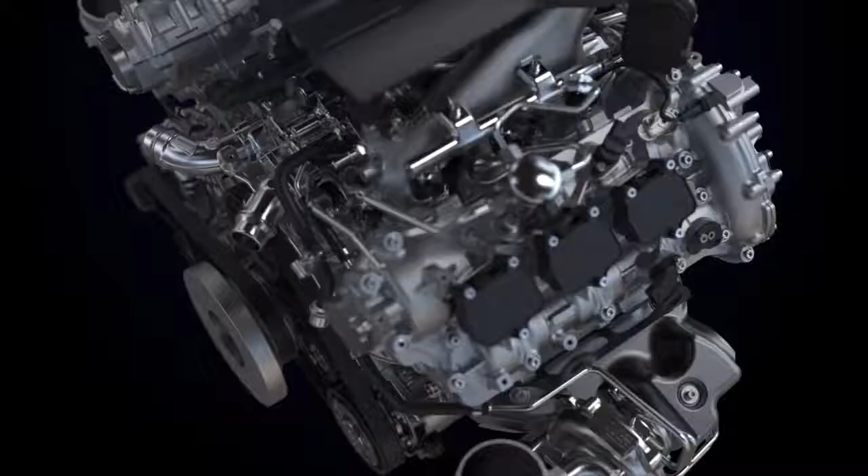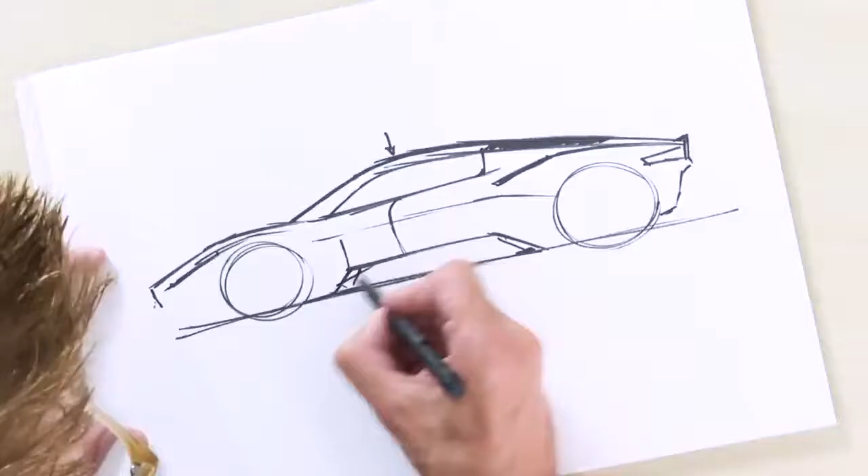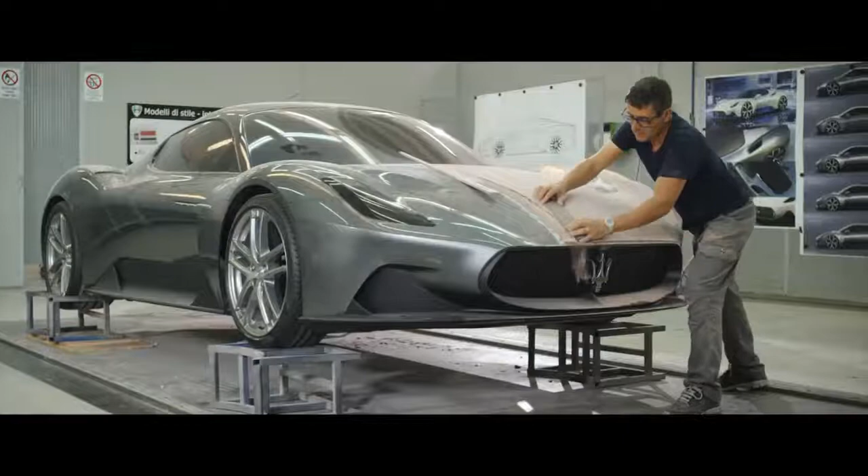Hello everyone and welcome. In this video we are learning about Maserati's fascinating new engine, a twin-turbo V6 that uses dual combustion chambers, with a pre-chamber igniting the main chamber for more efficient, more powerful combustion. This engine is going in the Maserati MC20, a car that was developed in the heavens using emergency blanket technology, brought down to earth, sculpted in expensive Italian Play-Doh, gift-wrapped with the same attention to detail you're used to on your own presents, and now displayed proudly to eyes around the globe through the internet's best free video site.

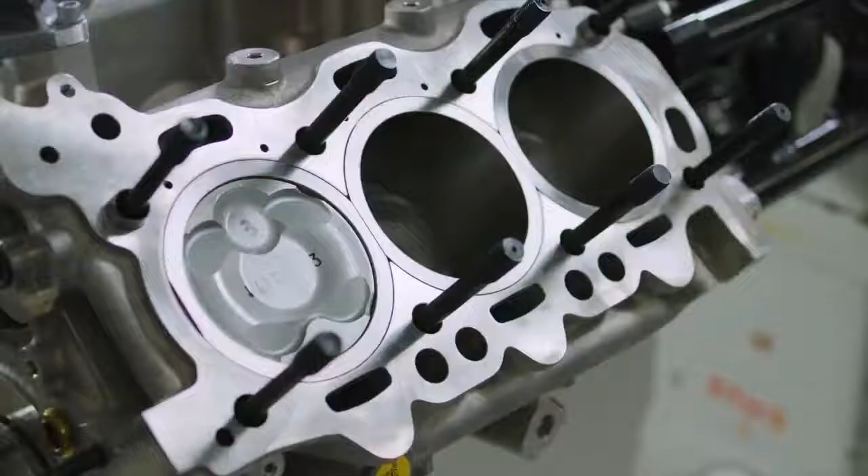Now, pre-chamber combustion is nothing new. Honda was using a similar technique in the 1970s, but Maserati has a unique approach to using pre-chambers in gasoline engines so that they can meet today's emissions requirements while still providing horsepower benefits.

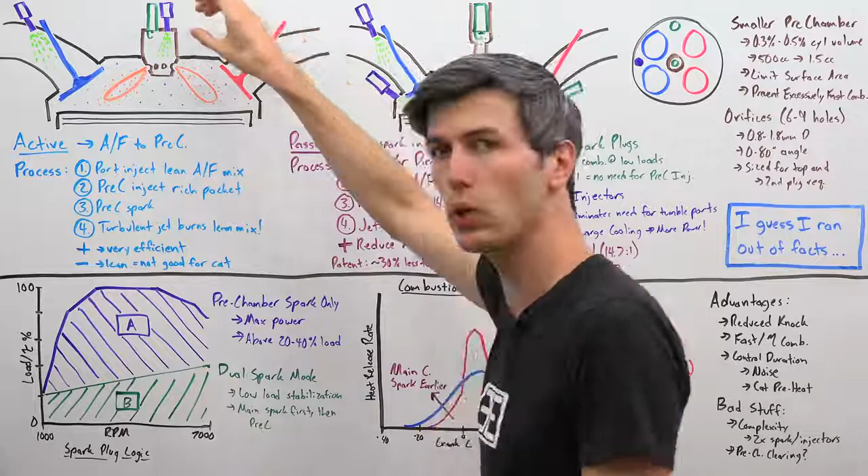I don't know of any current production cars out there using pre-chamber combustion technology. However, there are engines out there which are using active pre-chambers versus what Maserati is doing using a passive pre-chamber. The main difference is that the active chamber can put in fuel or air or both into the pre-chamber, and Maserati's system just has a spark plug with that pre-chamber. So it's not actively putting fuel or air into that chamber.

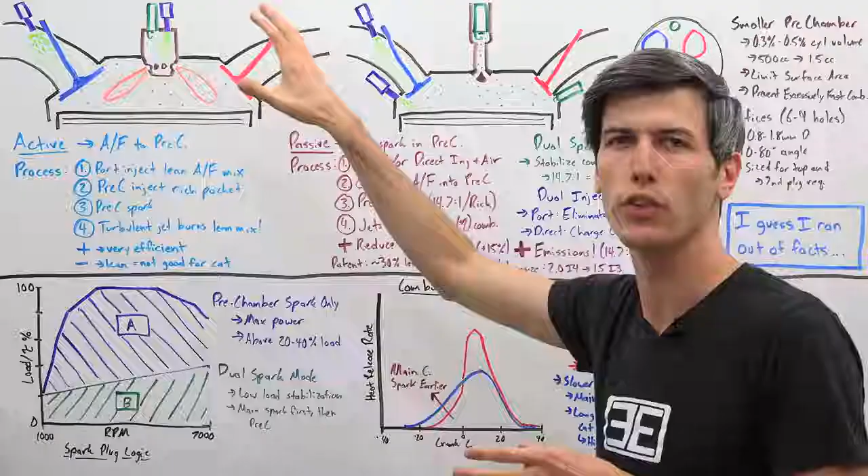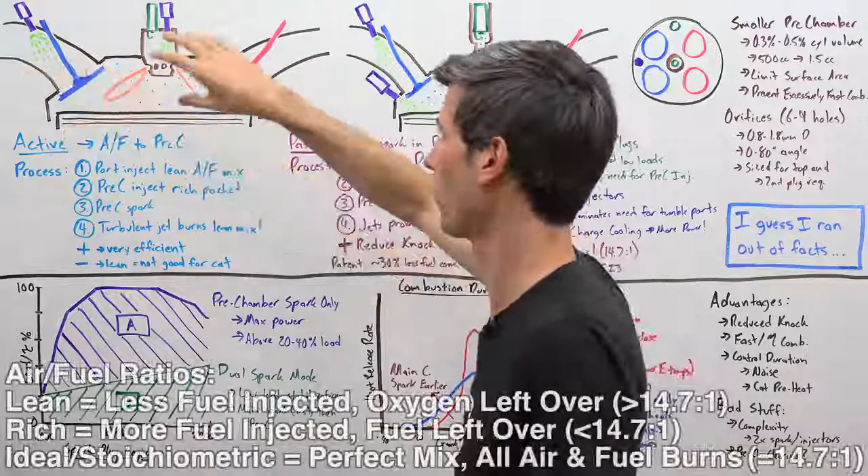So how do these active systems work? The process is as follows. You have two fuel injectors, one for the pre-chamber and one in your intake port. What this initial fuel injector is doing is getting in a very lean air-fuel mixture, so super lean, otherwise it wouldn't be combustible in a typical combustion engine. So a very lean air-fuel mixture that's coming in during that intake stroke.

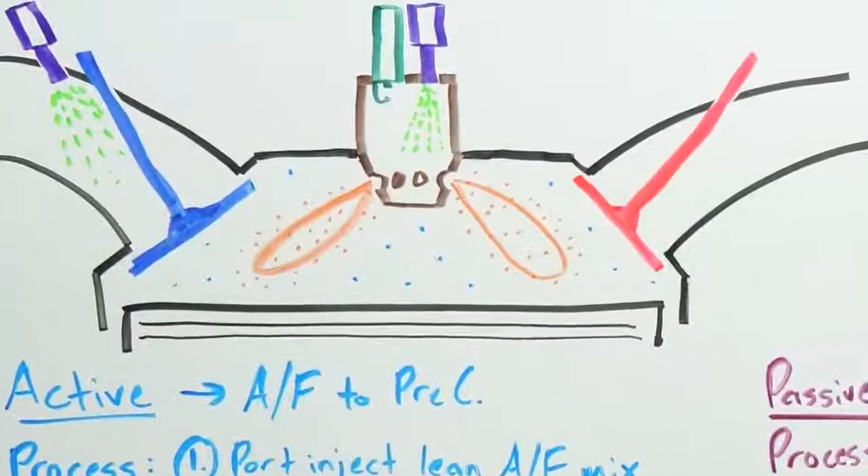Then you're going to pull in that air and fuel, compress that air and fuel with the piston, and then you have a separate injector which is going to spray fuel directly into this pre-ignition chamber. So now what you've done is you've created a rich air-fuel pocket in this pre-chamber, and then you have a very lean air-fuel ratio in the main chamber.

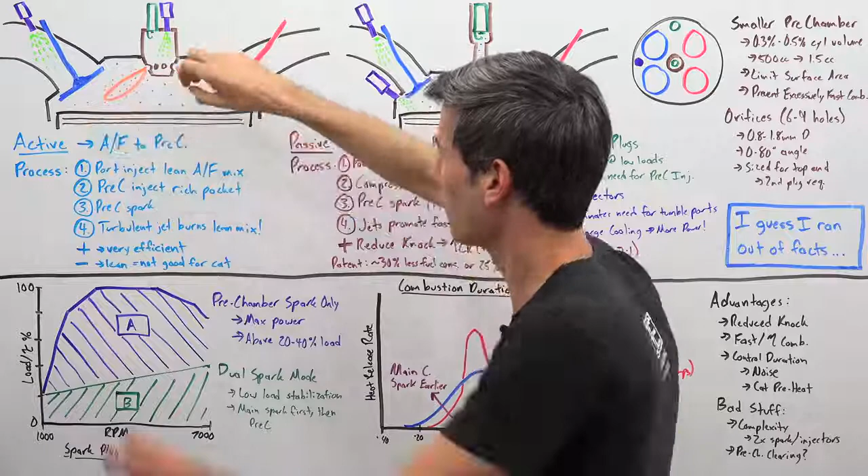And so you use the spark plug to ignite that air-fuel mixture, and what it does is it creates these turbulent jets. The pre-chamber has these little ports at the bottom of it, so that combustion comes spewing out in these turbulent jets, and because it expands over this wide area of the main chamber, it's able to actually burn off that lean air-fuel mixture.

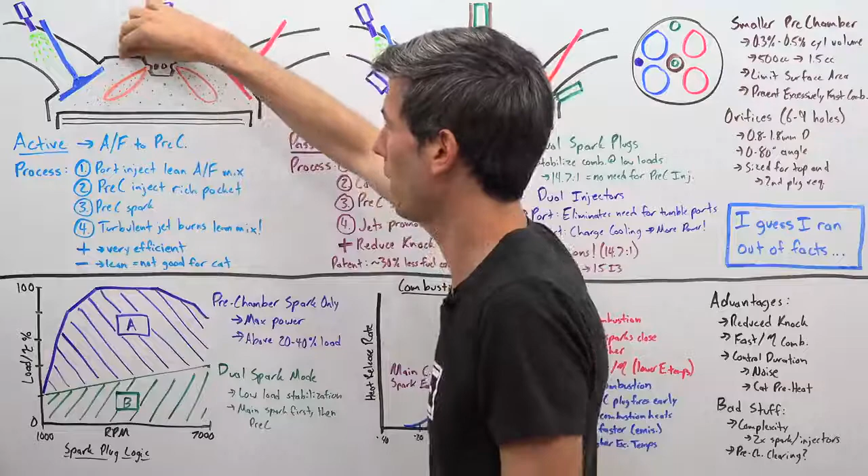Whereas traditionally, if you just had a spark plug in there, you wouldn't have consistent combustion. That combustion would spread very slowly. But because you shoot out these flames into the whole chamber, you're able to actually burn it. So the advantage of this is that you're able to use lean air-fuel mixtures that you otherwise wouldn't be capable of burning, meaning you're using less fuel overall, and thus it's a very efficient design.

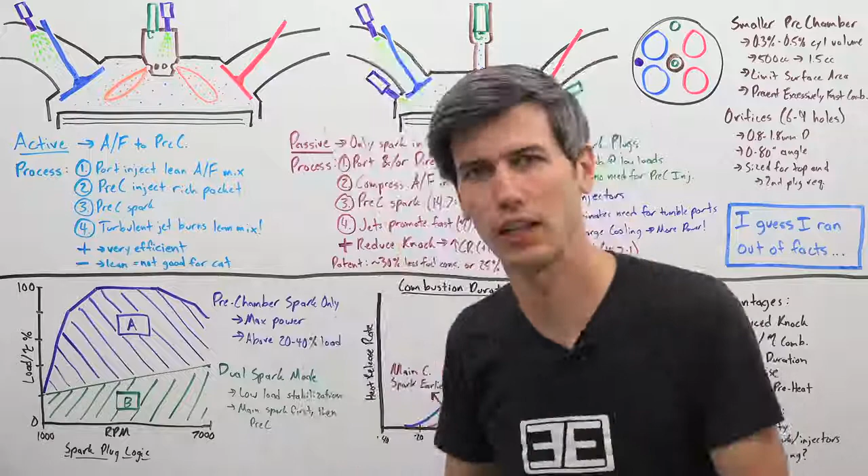Now, the challenge here is that for catalytic converters, which of course you need on an emissions compliant road car, they don't like lean air-fuel mixtures. They like it when the air-fuel mixture is right at stoichiometric ratio, 14.7 to 1. That is where catalytic converters operate in their most efficient region. And so because of that, using something like this is very difficult to do in a road car from an emissions standpoint.

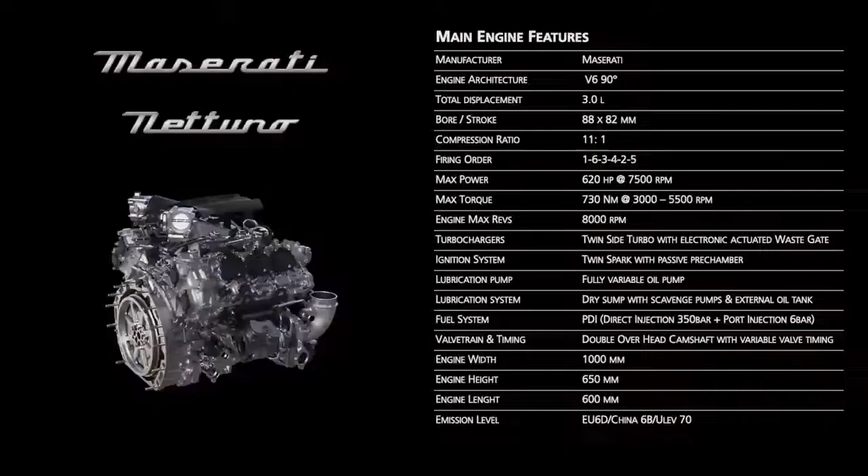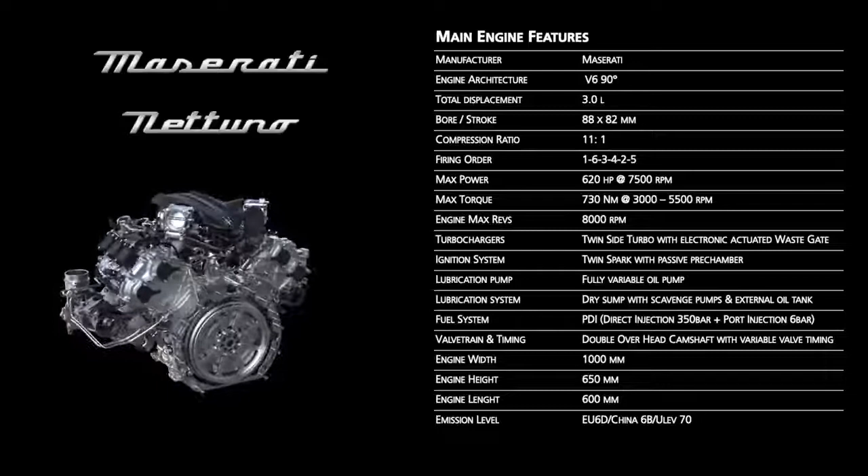Now, before we move on to how the passive system works in the Maserati engine, first let's just cover the general specs of the engine. It's a 3.0 liter twin-turbo 90-degree V6 engine. It's making 620 horsepower and 730 newton meters of torque with an 11:1 compression ratio and using relatively wide cylinders, each with an 88mm bore and an 82mm stroke. The engine revs up to 8,000 RPM, making over 200 horsepower per liter.

So how does a passive pre-chamber work? Again, passive simply means there isn't air or fuel directly injected into that pre-chamber. So how does it work with the Maserati? Well, basically you're going to have an option of either port injection, direct injection, or both. In this case, Maserati is doing both.

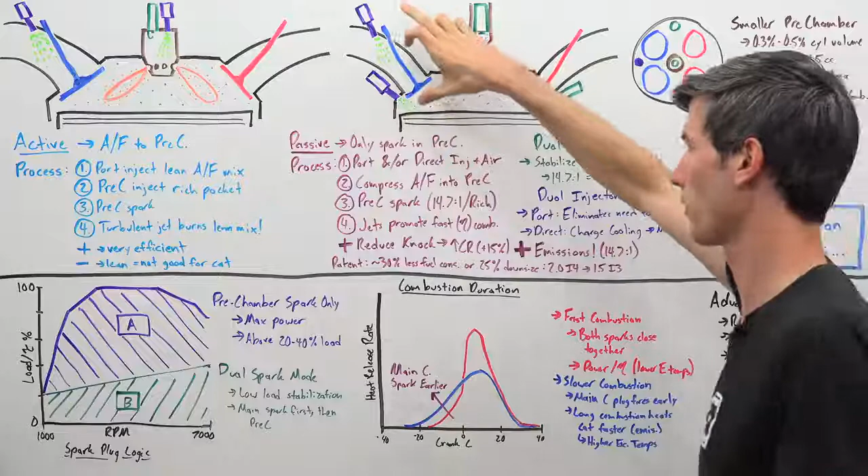And you then have an air-fuel mixture coming in, whether it's from the port or the combination with the direct, of 14.7 to 1. So you're at that ideal stoichiometric air-fuel ratio, which is the whole key to this thing, is that it's able to pass emissions because it's operating at that ratio. So how does that air-fuel mixture get inside of this pre-chamber?

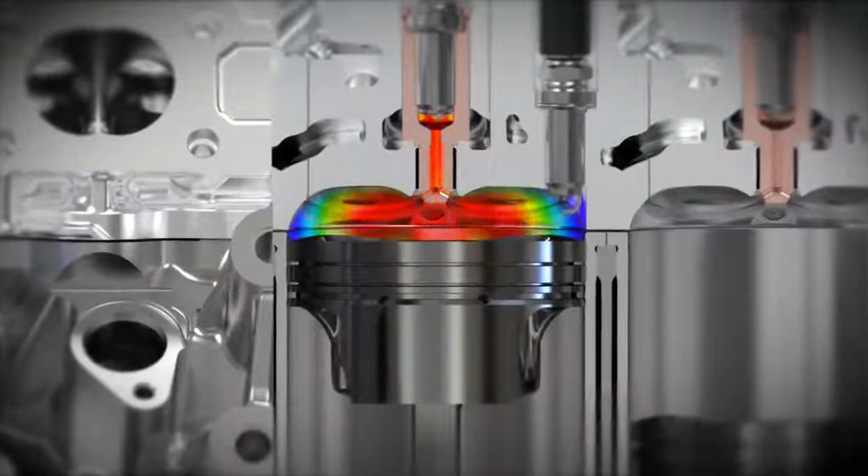That happens during the compression stroke. You have this piston come down, pull in that air and fuel, and then press that air and fuel together into the pre-chamber as well as the main chamber. Then your spark ignites that normal ideal air-fuel ratio, no problem for the spark, which comes down shooting out those turbulent flames, causing very quick combustion of the rest of the air-fuel mixture.

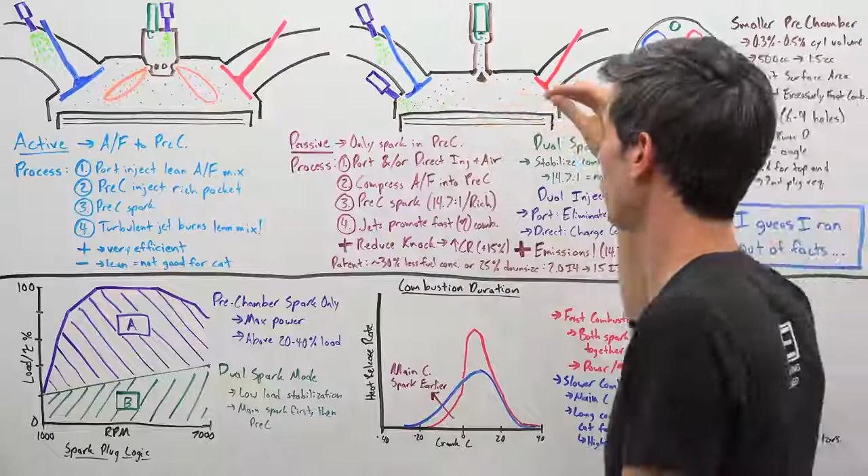The whole idea of this strategy is to speed up combustion, and by reducing the time it takes for combustion to occur, you're reducing the likelihood of knock. Maserati says, according to their patent on this engine, that by using this strategy they're able to increase their compression ratio by 15%.

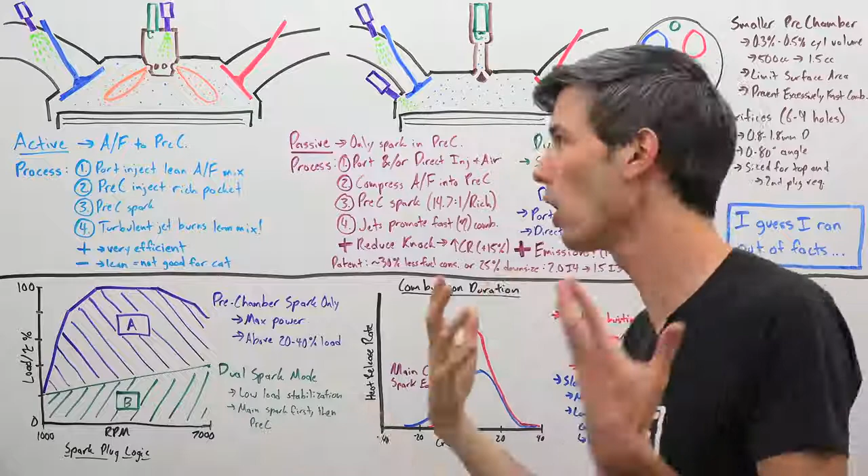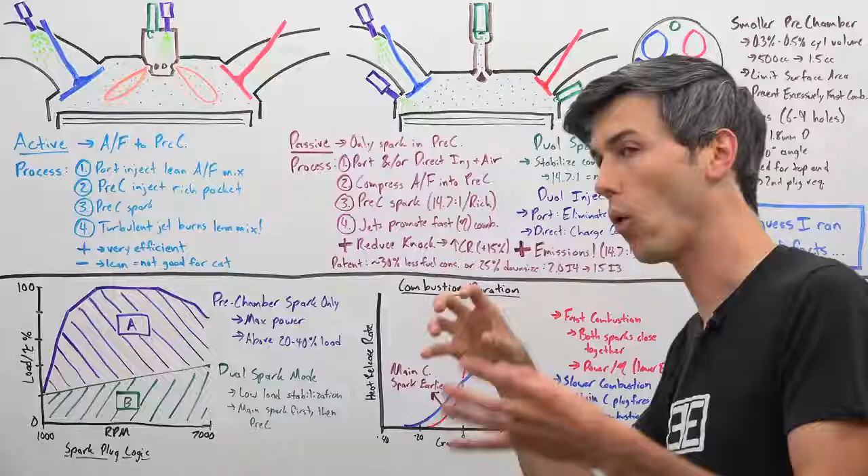The big kicker is that unlike an active system, it's able to meet emissions. Also according to their patent, they're able to reduce fuel consumption by 30%, or have an engine downsized by about 25%. So you can make the same horsepower in a 1.5 liter inline 3-cylinder that you could with a 2.0 liter inline 4-cylinder.

You'll notice there are two spark plugs, one on the side of the cylinder and one on top in the pre-chamber. If you looked at the layout from above, they wouldn't be on opposite sides. The spark plug sits between those two valves, and you'll have your direct injection on the side as well as port injection with the intake. This is just a simplified drawing so you can see it all in one image.

You have these two spark plugs, and we'll get into the strategy they use later in this video. The reason this is done is to stabilize combustion at low loads. At low loads, they actually use both spark plugs to ensure complete combustion, and at higher loads they're just using the top pre-chamber.

Because they're using that ideal air-fuel ratio, you don't have to use an injector in the pre-chamber since you don't have to build a little rich pocket. You already have an ideal air-fuel ratio in that pocket for the spark to ignite.

You'll also notice it has dual fuel injectors. Why is it doing this? By using a port injector, that gives it plenty of time to mix the air-fuel ratio. This eliminates the need for tumble ports, where intake air is caused to tumble as it enters the cylinder.

When you use direct injection, you have less time for air and fuel to mix, so you use tumble ports to have that air swirl and mix the direct injection fuel. The challenge is those tumble ports can restrict airflow coming in, which isn't ideal for engines going for high horsepower.

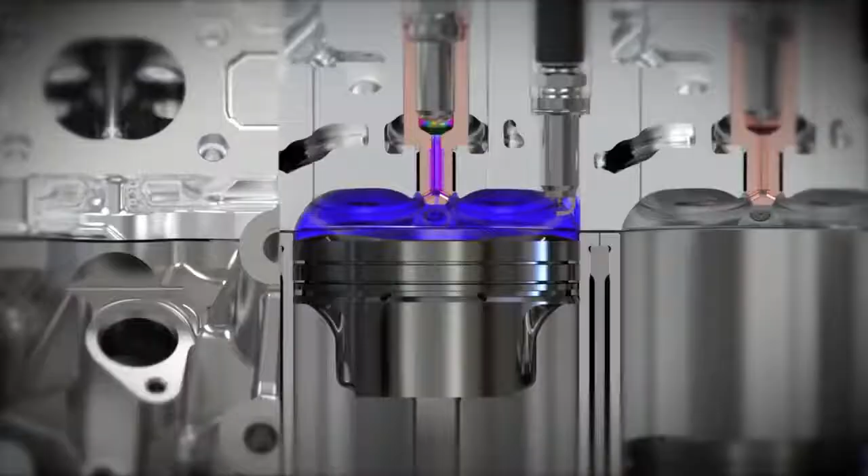You do actually have coolant jackets around that pre-chamber to help make sure it doesn't get too hot. One other aspect of this pre-chamber is that because it's small, there's actually a bit of a sweet spot in how quickly you want combustion to occur.

So the larger this pre-chamber, the more forceful your jets are going to be coming out of it, so they kind of want this smaller size to not have that excessively fast combustion. We'll get into the logic of why you want to control that a bit later, but looking at the pre-chamber, there's about 6 to 9 holes according to the patent. They're about 0.8 to 1.8 millimeters in diameter, and coming off the axis of the pre-chamber, they're at about 0 to 80 degree angles, and they are sized for the top end.

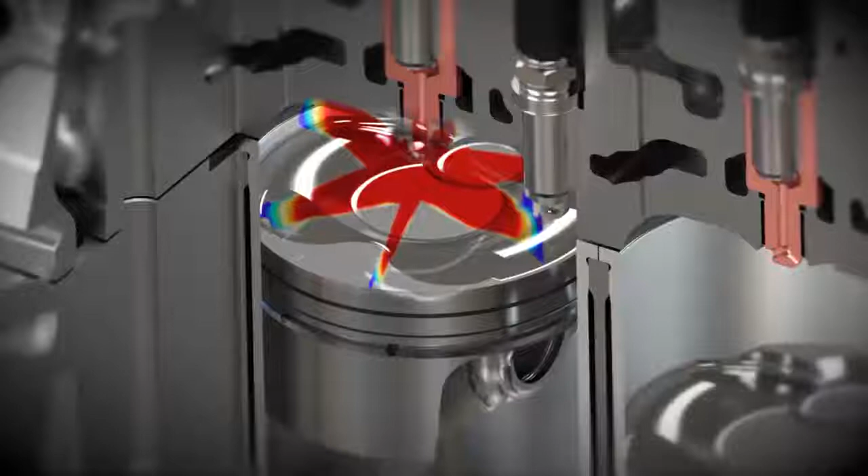And then of course you have that second spark plug, which is required for the bottom end, those low load scenarios. So getting into the logic of when they're using both spark plugs and when they're just using one. Here we have a plot, looking at RPM on the bottom versus load, or your torque percentage, on the vertical axis.

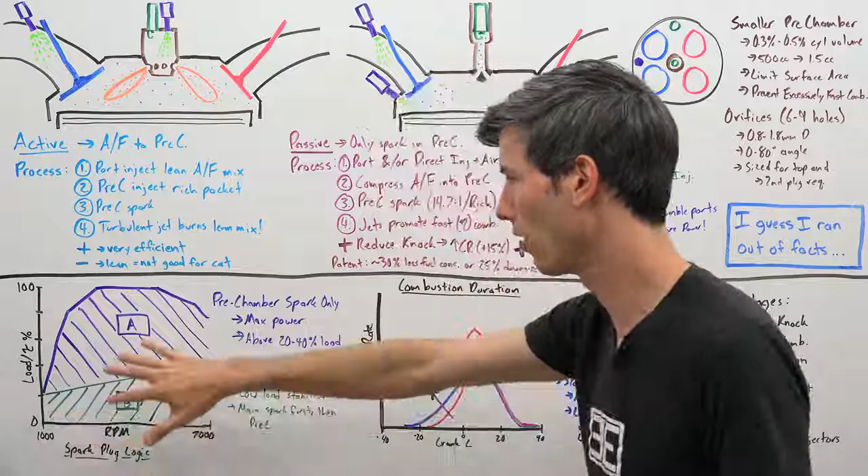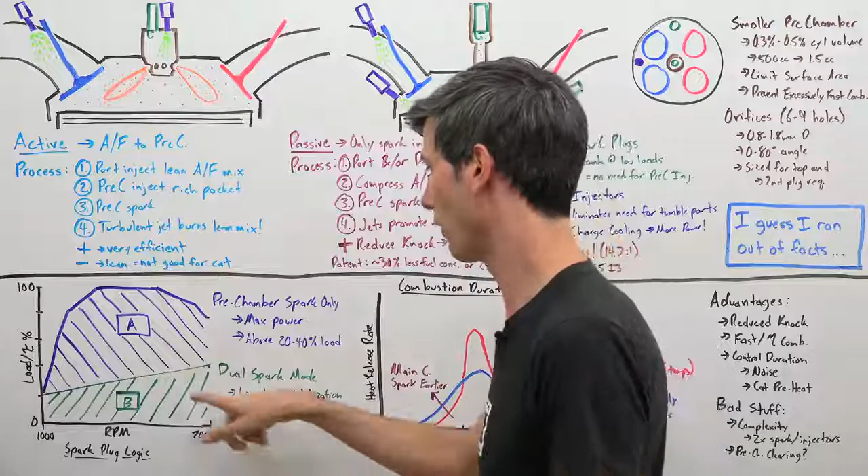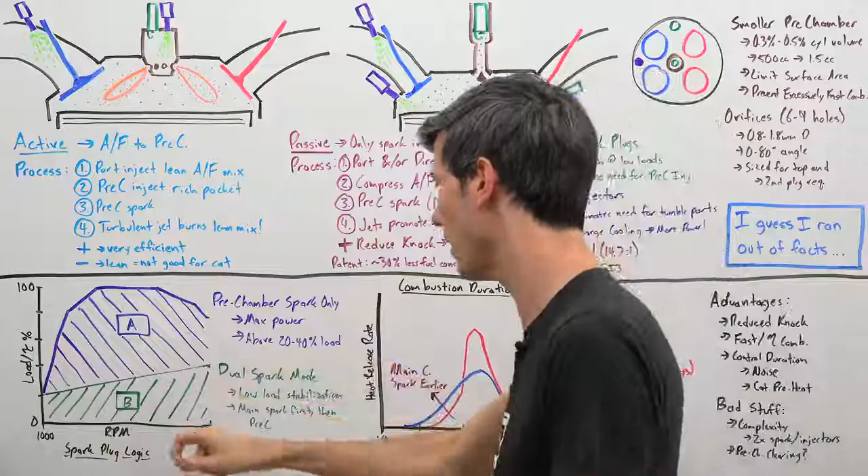So there's two different scenarios here. When you're at high loads at pretty much any RPM above about 20 to 40% load, whatever RPM you're at, if you're above that, then you're going to be using just the pre-chamber spark plug for maximum power. And below that, in order to have low load stabilization of that combustion, you're going to be using both spark plugs. So you'll actually fire the main chamber spark plug first, and then the pre-chamber spark plug a little bit later.

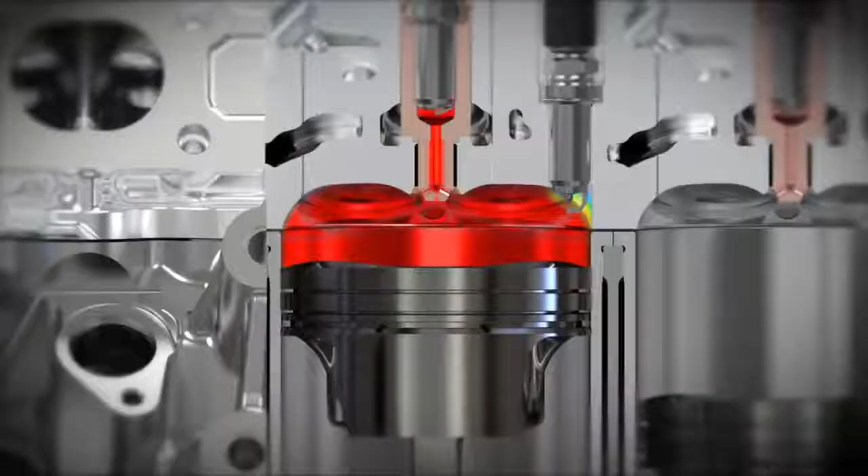Now, one of the interesting things you can do by changing the delay between when you fire this spark plug and when you fire this spark plug is you can change the duration of combustion. So the earlier you fire the main chamber spark plug and the longer delay you then have until you fire the pre-chamber spark plug, the longer combustion is going to be. So you're going to have a slower combustion versus if you fire them both fairly close together, you're going to have more rapid combustion occur.

And so you can use this to your advantage. If you're trying to go for a bit more power, a bit more efficiency, then you of course want to speed up that combustion. But when you just start a cold engine, you want to get that catalytic converter up to temperature really quickly. So what you do is slow that combustion down by delaying between when you fire each of the spark plugs, and this gives you a long combustion, which gives you higher exhaust temperatures, heating up your catalytic converter and making it effective much more quickly.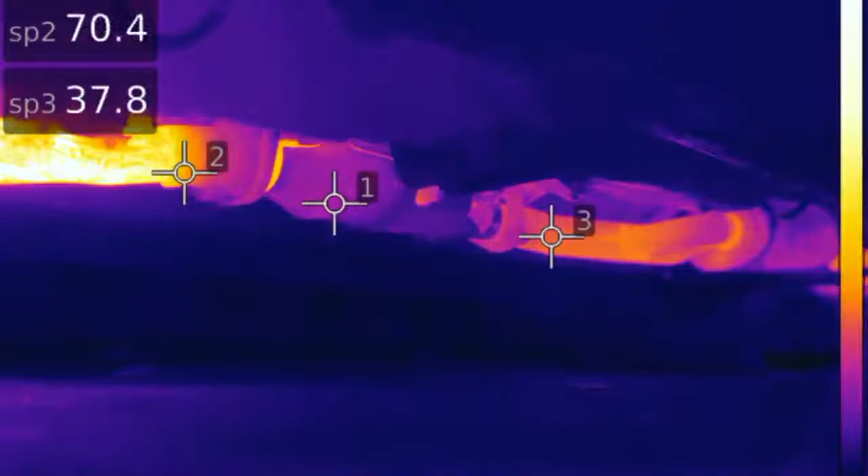So to summarize the advantages of this style of engine: the big one they're going for is reduced likelihood of knock, thus allowing you to make more power, have faster combustion, and operate more efficiently. You're able to control the duration of combustion, which not only helps control when that catalytic converter is up to temperature, but also allows you to reduce noise. So when you're at low load, you can slow down combustion and have the engine be a bit more quiet, somewhat important for luxury vehicles out there.

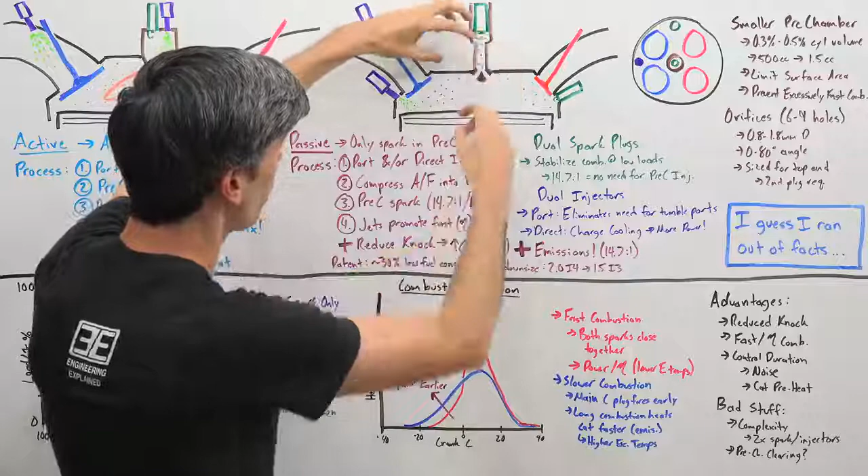Now, as far as the bad stuff, of course there is a complexity to this. You've got dual injectors for every cylinder, dual spark plugs for every cylinder, and this pre-chamber, so the complexity is there. The other thing I'm kind of curious about, and how effective it will be long term, is this pre-chamber, because there's nothing really forcing it to clear out except pressure differences. So when you're compressing that air and combustion is occurring, I'm wondering how much is getting left behind in this pre-chamber and not just refreshed every single cycle.

But of course there's testing that goes into these before they just get released out. So we will see, time will tell how these engines do. But it is a very fascinating technology, and it's really cool to see this kind of innovation in a road car.

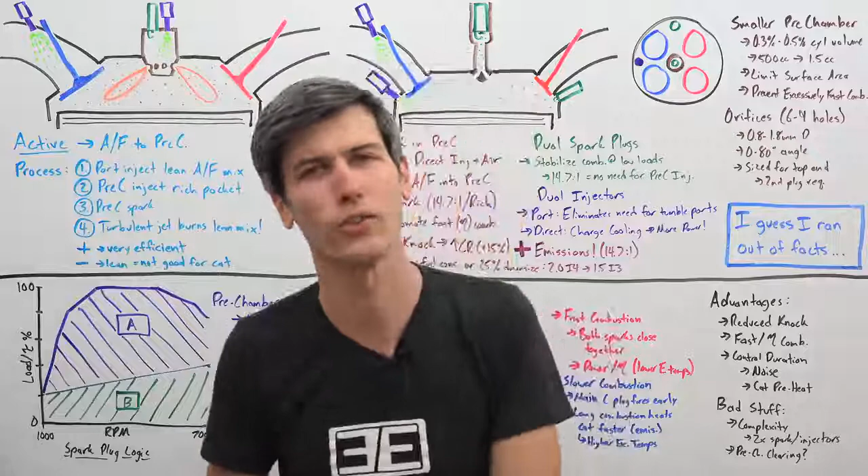And to the EV folks out there wondering why are they doing all this, guess what? There's going to be an EV MC20.